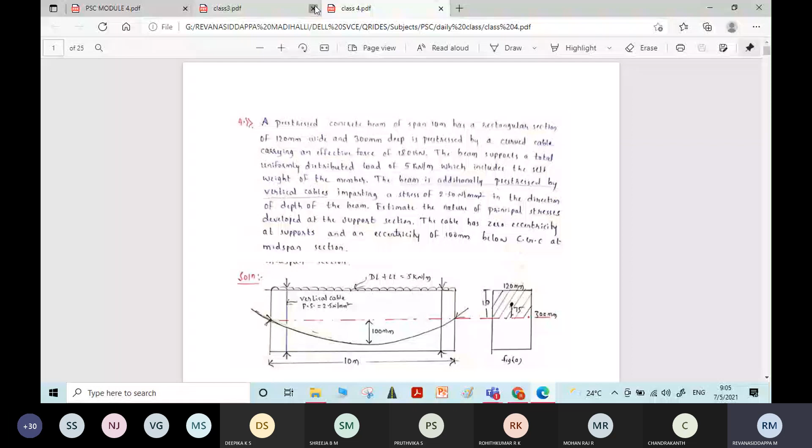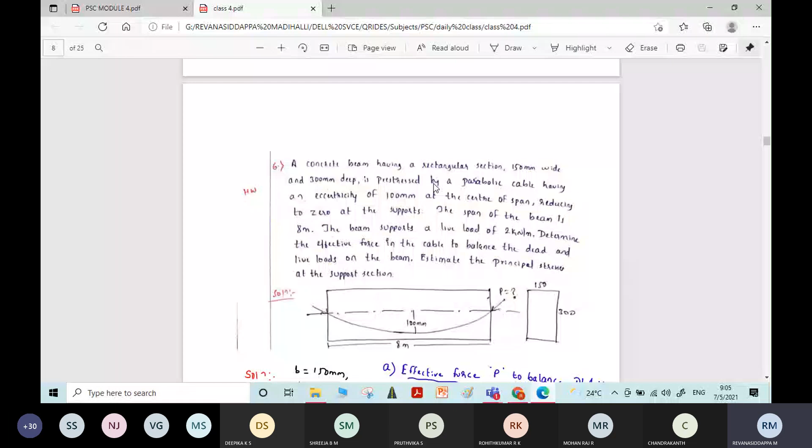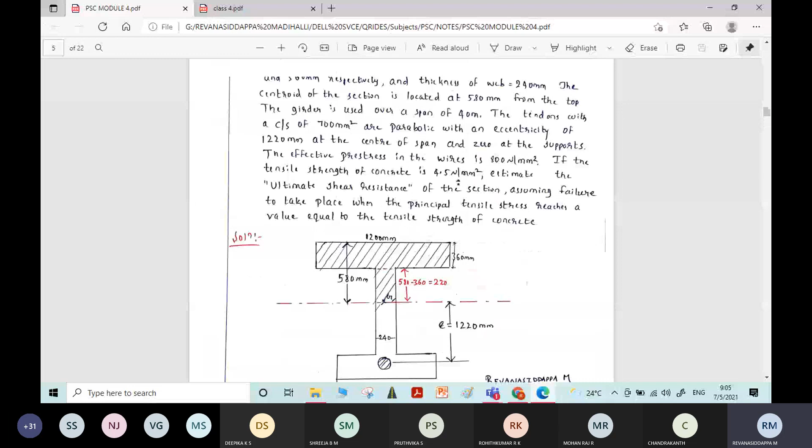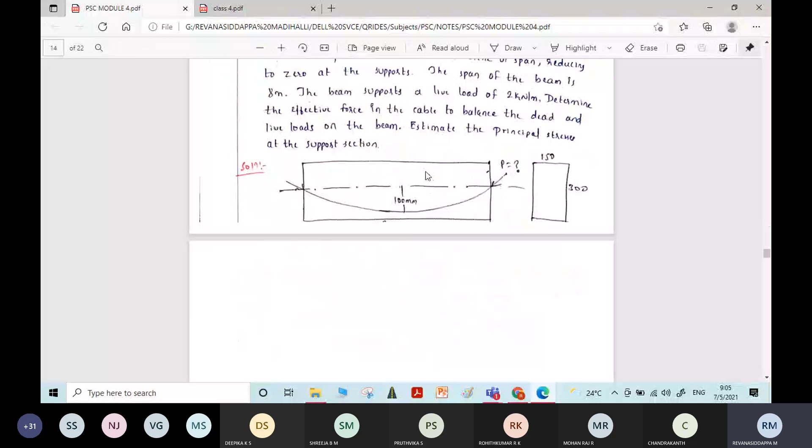We have solved up to problem number 6. Today we'll start with problem number 7. So all of you please note down problem number 7. Take 2 minutes time.

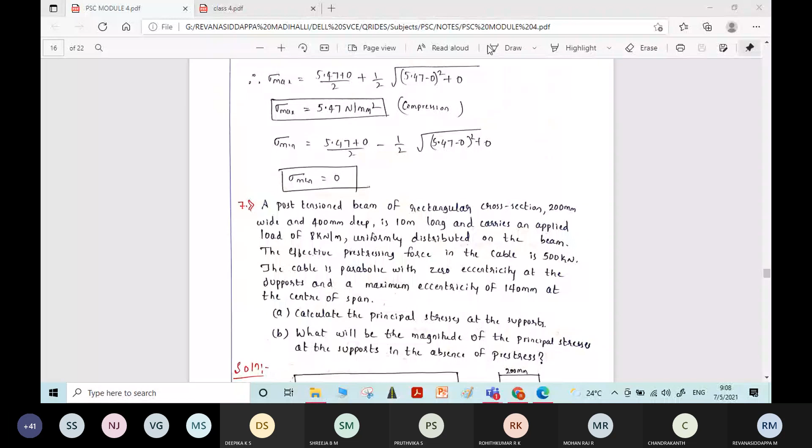Write the diagram as well. Over, students? Written or still writing? Writing, sir. Okay, I think you all have written. Shall we proceed? Yes, sir.

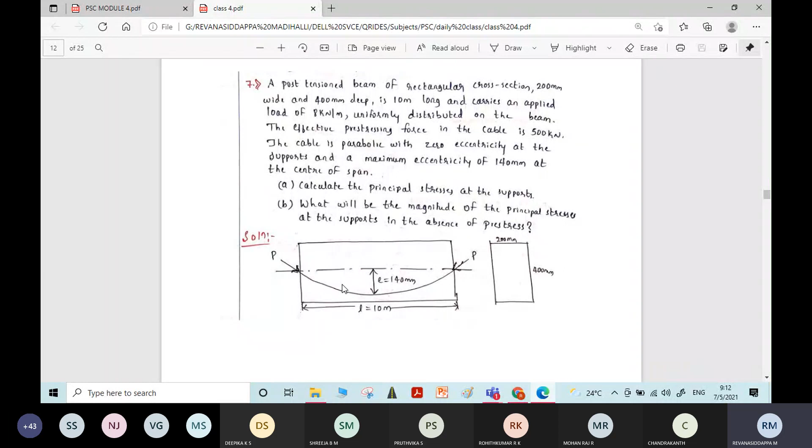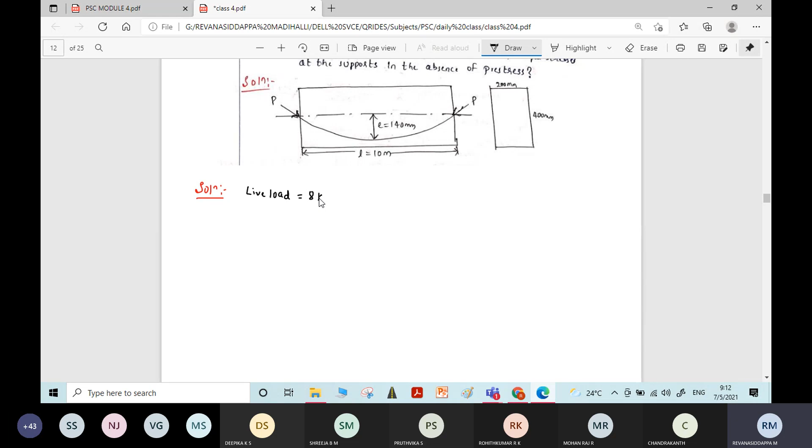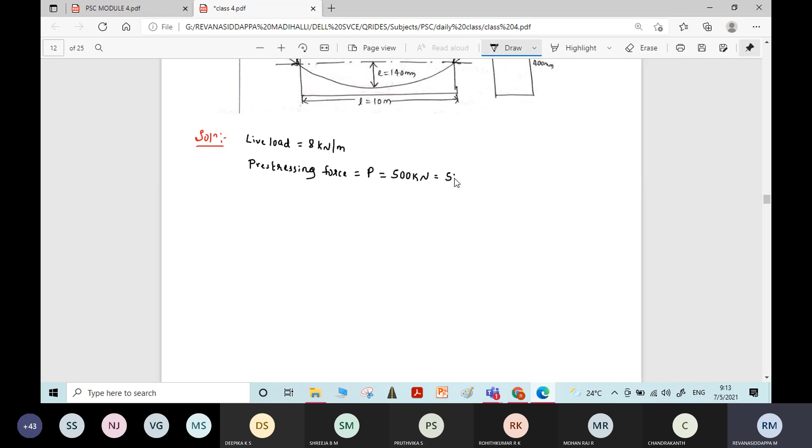Live load is given as 8 kilonewton per meter. Then effective pre-stressing force P is given as 500 kilonewton. P is equal to 500 kilonewton, that is 500 Newton times 10 power 3. Okay, then what else is given? Eccentricity and all given, that is written in the figure only.

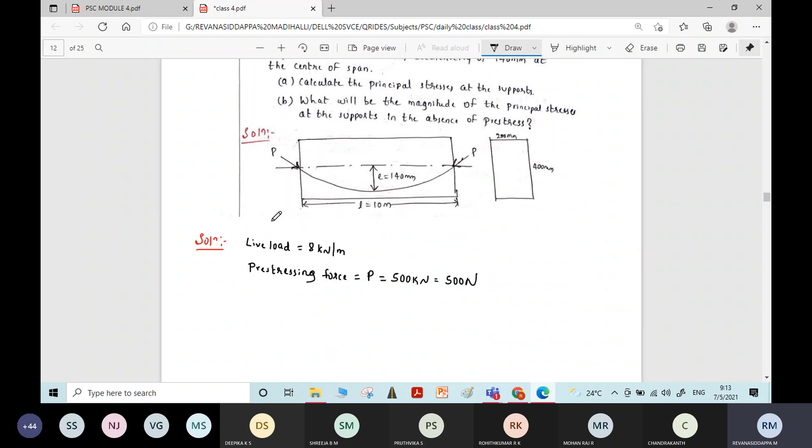Okay, now we will go with the first question to calculate principal stresses at the supports. First one: principal stresses at the support.

Okay, we have the formula, right? That formula you write it, and whatever the required parameters to be determined, that you find and substitute, you will get the answer. So we know the formula for finding the principal stresses, that is sigma max or sigma minimum is equal to fx plus fy divided by 2, plus or minus half of root of fx minus fy whole square plus 4 tau v square.

Okay, you find one by one. First you find fx, horizontal pre-stress. Fx is equal to P by A. Area of cross section we can find it, A is equal to b into d.

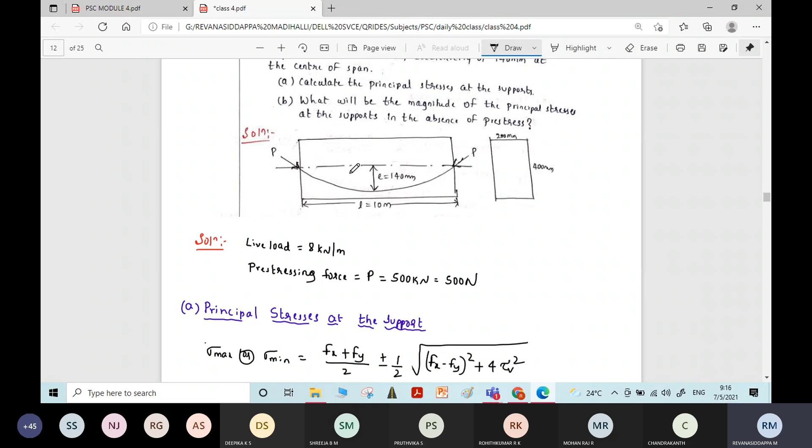Then what else is required? Fy is required, a vertical pre-stress, and there is no vertical tendons given in the beam. Therefore, Fy will be 0. Fy, vertical stresses, equal to 0.

Then Fx is over, Fy is over. What else is required? We need a shear stress tau v, right? To find tau v, we have the formula. Tau v is equal to Vu into Ay bar divided by I into B.

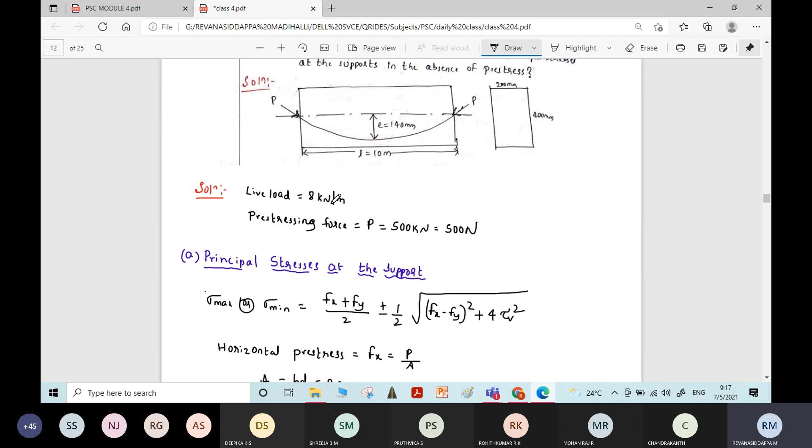Now we need shear force which is acting at the support, and in the problem the live load is given. Self weight of the beam should also be considered, right? First you find the self weight or dead load of the beam. Live load is given. The dead load plus live load will give the total load, and using that total load we will find the shear force at the support.

Okay, therefore the dead load of the beam is given by: dead load of beam is equal to, the cross sectional area is 0.2 into 0.4, that is 200 mm by 400 mm. 0.2 into 0.4 into density 24. So what is the dead load? 1.92 kilonewton per meter.

Then live load on the beam is given. Live load on beam is equal to 8 kilonewton per meter. Therefore, the total load is equal to 1.92 plus 8, that is 9.92 kilonewton per meter.

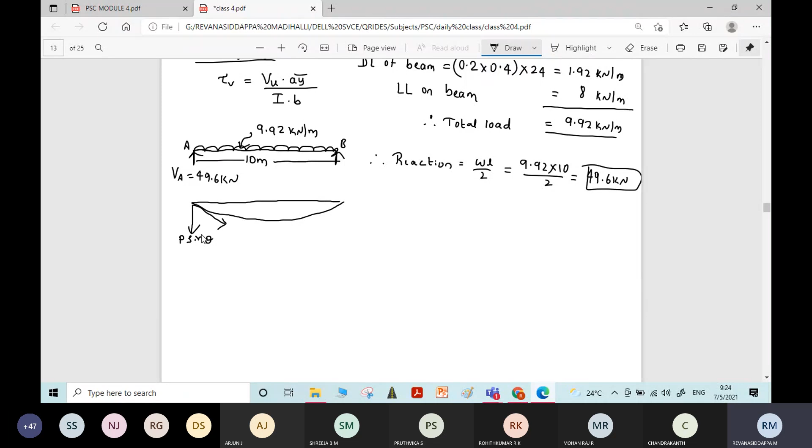It's a parabolic cable. So vertical component of the pre-stressing force is P sin theta. Therefore, total reaction at the support is VA minus P sin theta. Total shear force acting at the support is the difference of the reaction at the support and the vertical component of the pre-stressing force. So it is VA minus P sin theta. For parabolic cable, we know the formula for sin theta.

For parabolic cable, the sin theta value is, what is the formula? 4E by L, correct? 4 into eccentricity at the mid span is 140 mm, into 140, divided by 10 meters the span, that is 10,000. So by this you will get sin theta value as 0.056.

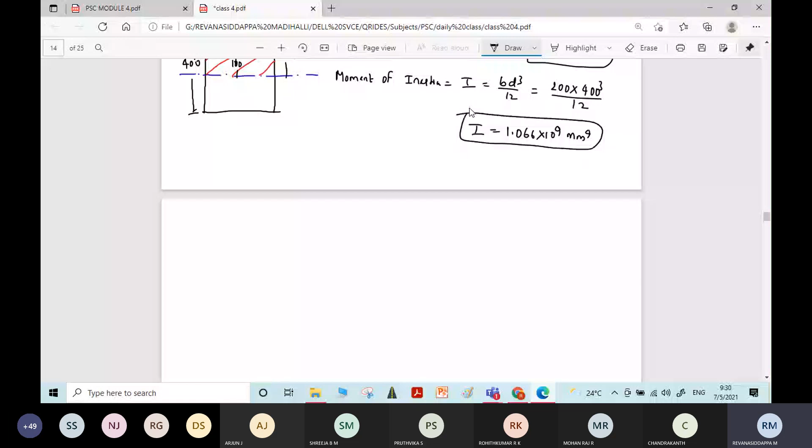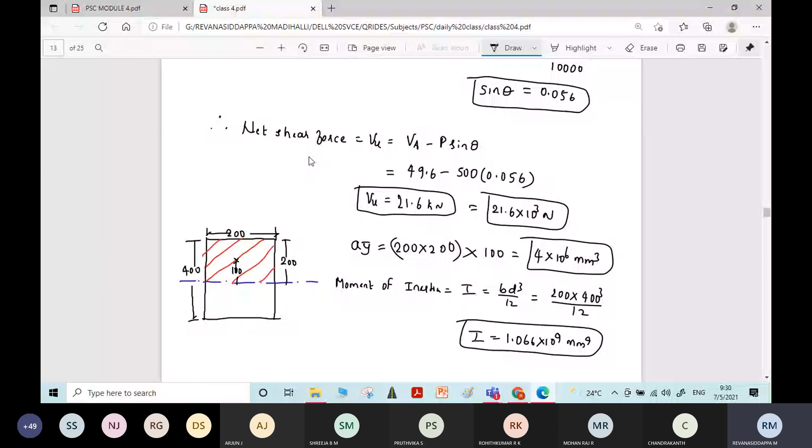Width of the beam, now you can calculate total shear stress. Therefore, tau v is equal to Vu into AY bar divided by IB. Vu is 21.6 into 10 power 3 Newton, into AY bar value is 4 into 10 power 6, divided by I, which is 1.066 into 10 power 9, into width of the beam which is 200. Therefore the shear stress is equal to how much? 0.405 Newton per mm square.

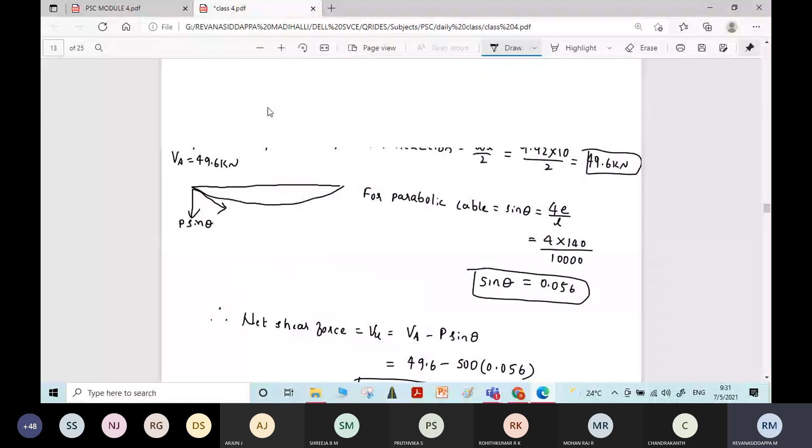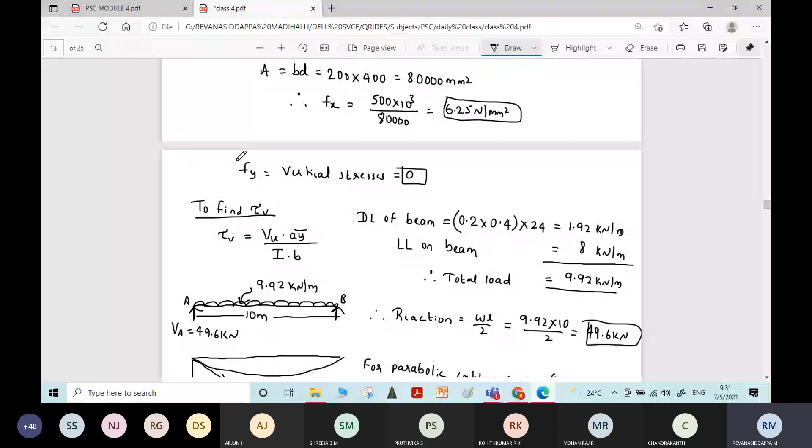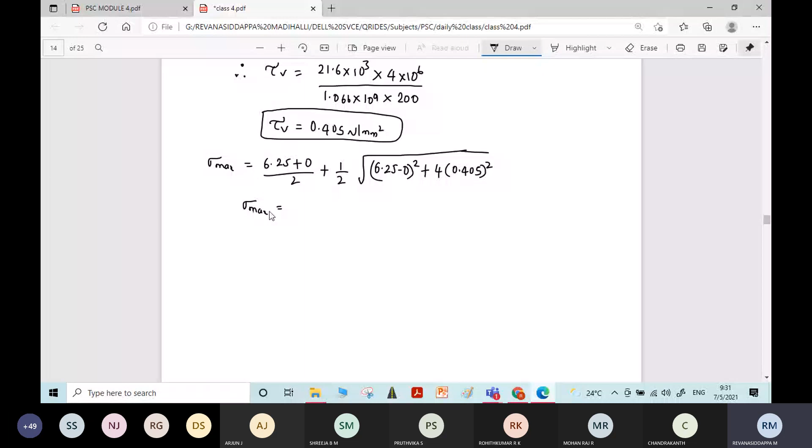Now you can find principal stresses, sigma max or sigma minimum. Every parameter is known, now just substitute and get the answers. First find sigma max. Sigma max is equal to fx plus fy divided by 2. Fx value is 6.25, Fy is 0. Therefore it is 6.25 plus 0 whole divided by 2, plus half of root of fx minus fy, that is 6.25 minus 0 whole square, plus 4 tau v square into 0.405 whole square. How much? 6.27, yes, 6.27 Newton per mm square. You are getting the positive answer, which is nothing but the compressive stress.

Compressive stress. Then find sigma minimum, which is equal to 6.25 plus 0 whole divided by 2, minus half of root of 6.25 minus 0 whole square plus 4 into 0.405 whole square. Tell me the answer. Minus 0.026 Newton per mm square, which is tension.

To this, the first problem or the first question is over. Now we'll move on to the next question. Just look into the next question. What will be the magnitude of the principal stresses at the supports in the absence of pre-stress?

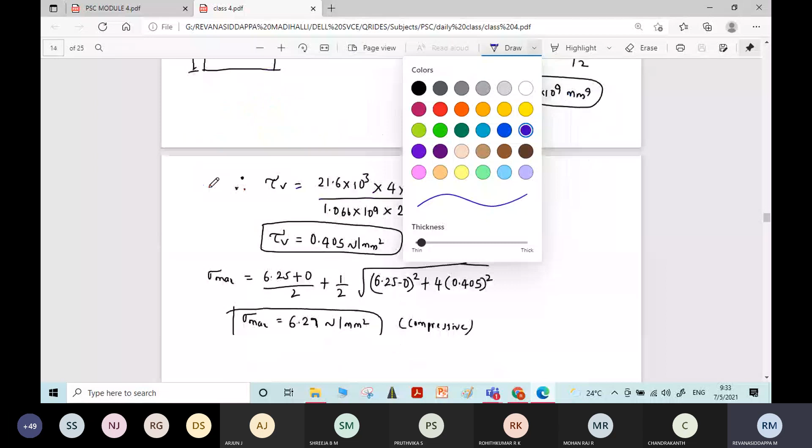Here pre-stressing force P equal to 0 in second case. Case B, principal stresses, problem number B, principal stresses in the absence of pre-stress, that is P equal to 0.

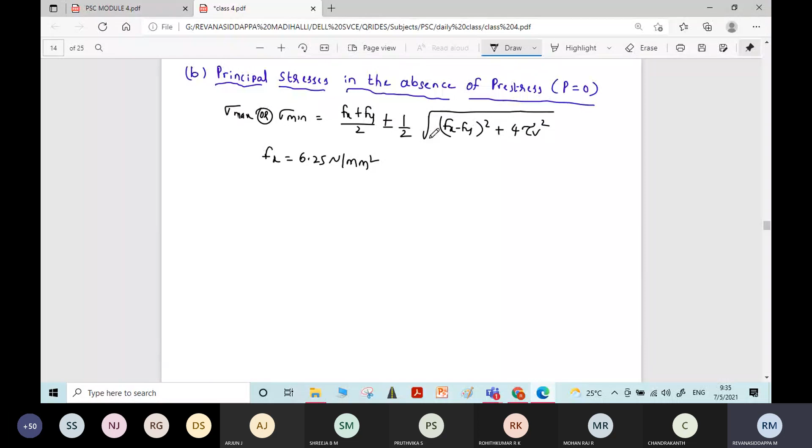Use the same formula. We know that sigma max or sigma minimum is equal to fx plus fy divided by 2, plus or minus half of root of fx minus fy whole square plus 4 tau v square. Fx is 6.25 Newton per mm square, that we have earlier determined already. Here pre-stressing force P equal to 0, that is why it becomes 0. Fx equal to P by A. Here pre-stressing force is equal to 0, therefore Fx becomes 0. Fy is already 0.

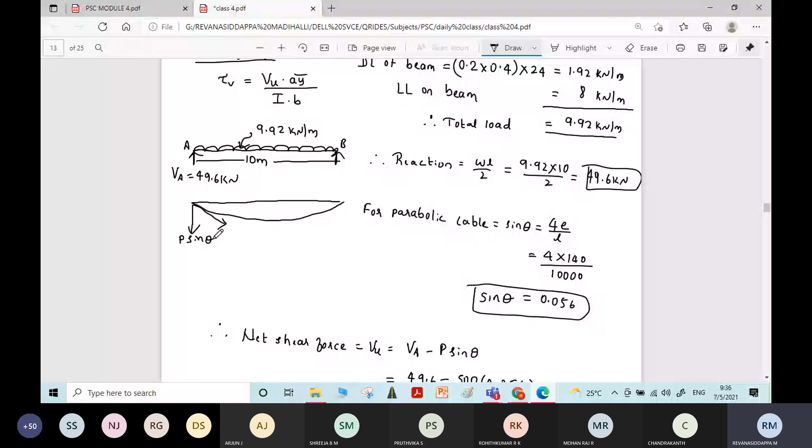And tau v, shear stress, again you write the formula and perform the calculation. Tau v shear stress is equal to Vu into Ay bar divided by Ib. We know the reaction at the support. Reaction at the support Va is equal to how much it was? 49.6 kilonewton. Now let us write the diagram once again. 49.6 kilonewton. Then we need P sin theta value. P sin theta value will be equal to 0 because pre-stressing force P equal to 0.

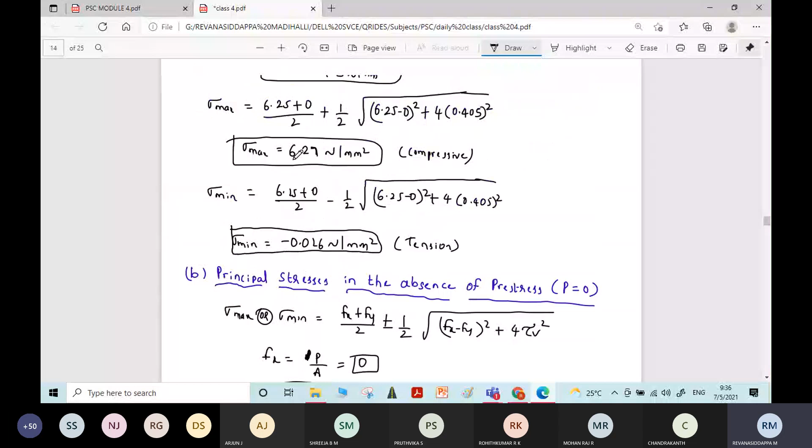Therefore, what is the net shear force which acts at the support section? Therefore, the net shear force is equal to Vu is equal to Va minus P sin theta. Therefore, Vu is equal to Va which is 49.6 minus 0, equal to 49.6 kilonewton. So as there is no pre-stressing force, whatever the reaction at the support is, that is only the shear force which is acting at the support section, 49.6 kilonewton only. Now you find tau v.

Tau v is equal to Vu, 49.6 into 10 power 3 Newton, into Ay bar. Earlier we have already calculated it, how much? 4 into 10 power 6. Tau v is equal to Vu into Ay bar divided by Ib. Moment of inertia, how much it was? Moment of inertia is 1.066 into 10 power 9.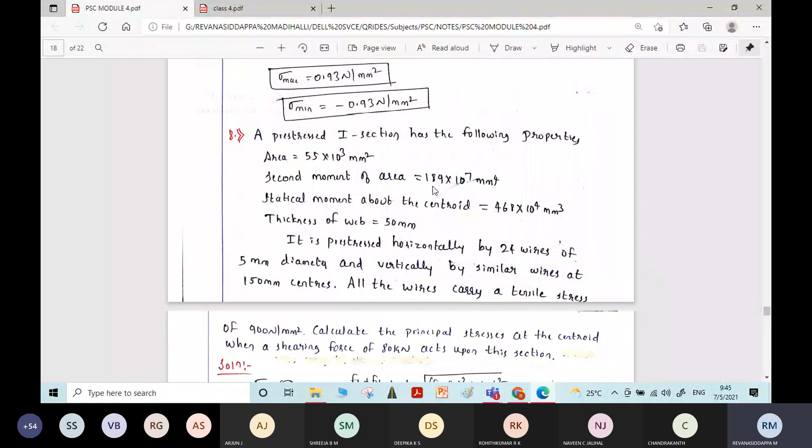Over, students. Yes, sir. Okay, all of you could just go through the problem.

A pre-stressed I section has the following properties. Area, total area of the I section is given, cross-sectional area. Second moment of area is given. Then second moment of area is what? What is the meaning of second moment of area? It is nothing but moment of inertia. Okay, moment of inertia. Then static moment about the centroid is given.

Static moment about the centroid means what? Static moment about the centroid, it is AY bar. Okay, static, you are taking moment of area about the centroid. That is why it is called static moment about the centroid. Therefore, it is called AY bar only.

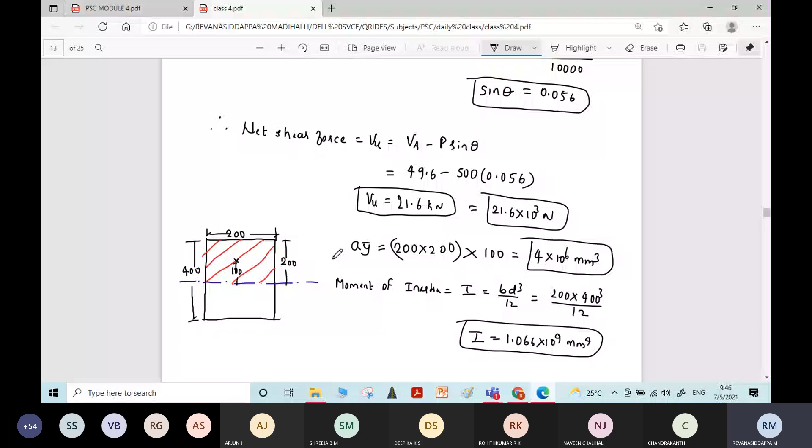Okay, AY bar only, don't get confused. AY bar is given. Thickness of web is given. And it is said that it is pre-stressed horizontally by 24 wires of 5 mm diameter and vertically by similar wires at 150 mm centers. Here pre-stressing is given in both horizontal and vertical direction. In the horizontal direction there are 24 number of wires of 5 mm diameter, and in the vertical direction the same diameter bars are spaced all along the length of the beam at 150 mm center to center.

You go through the next point. All the wires carry a tensile stress of 900 Newton per mm square. It may be a horizontal wire or vertical wire. All the wires are carrying a tensile stress of 900 Newton per mm square, that is, pre-stress in the wires is given. Pre-stress in the horizontal wires and vertical wires is given as 900 Newton per mm square.

It is asked to calculate the principal stresses at the centroid when the shearing force of 80 kilonewton acts on this section. Even the shear force is given. So using all this data, we need to find the principal stresses. Okay, solution.

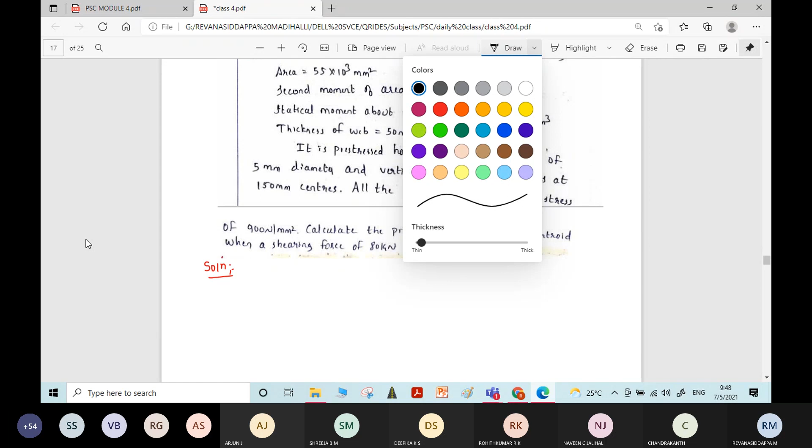First you write all the given data, whatever it is given in the problem. Area of cross section is given, A. Area of cross section A equal to 55 into 10 power 3 mm square.

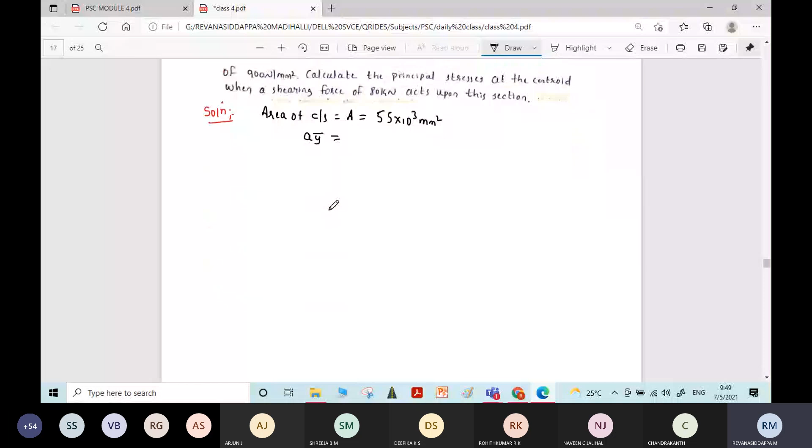Then second moment of area, which is nothing but AY bar, is equal to 189 into 10 power 7 mm. Sorry, second moment of area, moment of inertia, right? Moment of inertia. Better I'll write one more step here.

Second moment of area is equal to, it's nothing but moment of inertia. I is equal to 189 into 10 power 7 mm4.

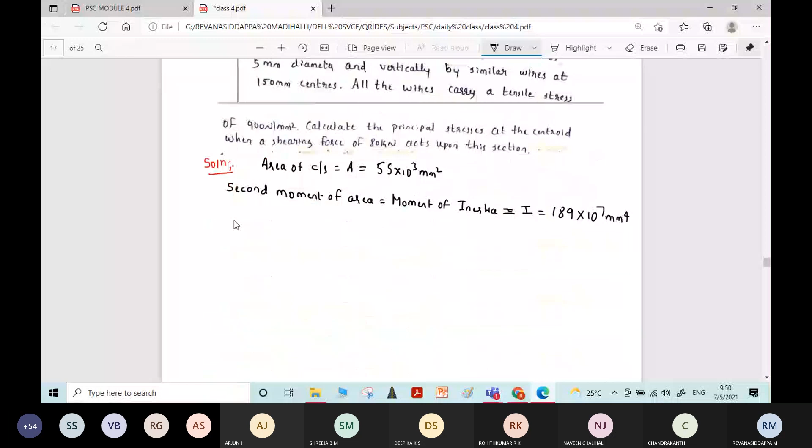Static moment about centroid, which is nothing but AY bar, is equal to 468 into 10 power 4 mm cube.

The thickness of web is given. Thickness of web, BW, is given as 50 mm.

What else is given? It is pre-stressed horizontally by 24 wires of 5 mm diameter. Calculate the total area of pre-stressing steel. There are 24 wires having 5 mm diameter. Area of cables is equal to area of one bar, pi d square by 4, that is 5 square by 4, into 24 numbers. The answer is 471.23 mm square.

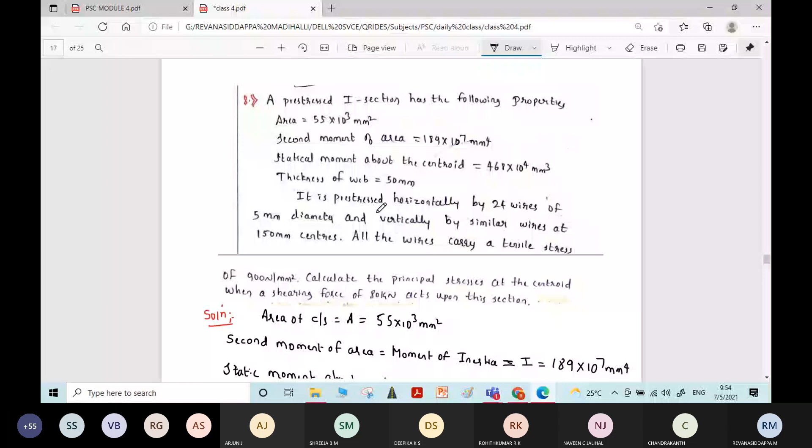Then what else is given? Shear force is given. Shear force Vu is equal to 80 kilonewton. Okay, this is all the given data. Now the question is to find principal stresses. Calculate the principal stresses at the centroid when a shearing force of 80 kN acts on the section.

We need to find principal stresses. We know the formula to find the principal stresses. Sigma max or sigma minimum is equal to fx plus fy whole divided by 2, plus or minus half of root of fx minus fy whole square plus 4 tau v square.

Now you find one by one. First fx, horizontal pre-stress. Fx is equal to, what is the formula? P by A. Here A is area of I section, area of cross section, not area of the cables. So to find pre-stressing force we used area of cables, but here to find horizontal pre-stress we need to use area of the section. Pre-stressing force we have already calculated, 424.1 into 10 power 3, divided by area.

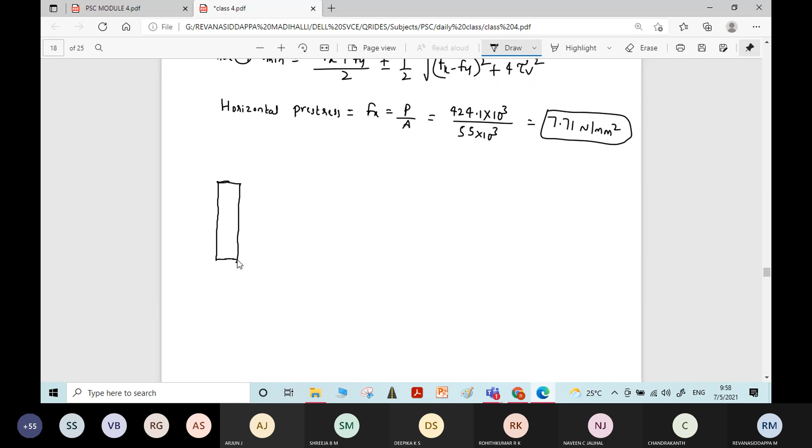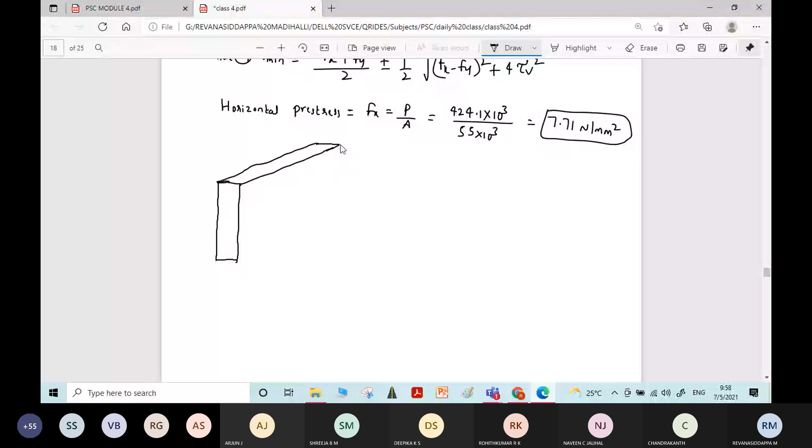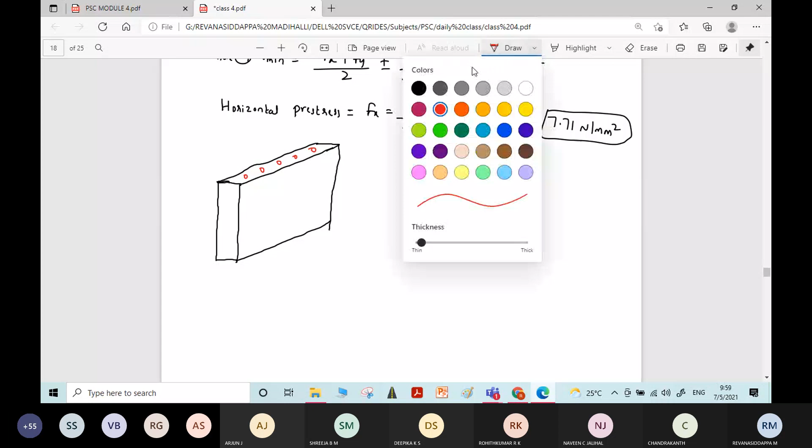Here I have written the web of the beam, just the web of the beam. Flanges are not written, whatever diagram I have written is the web of the beam. In the problem it is said that there are 5 mm diameter bars placed at 150 mm center to center all along the length of the beam, like this. So this spacing is 150 mm, and diameter of the bar is 5 mm.

So we need Fy. I'll write the plan of the diagram, the same diagram now. I'm writing the plan.

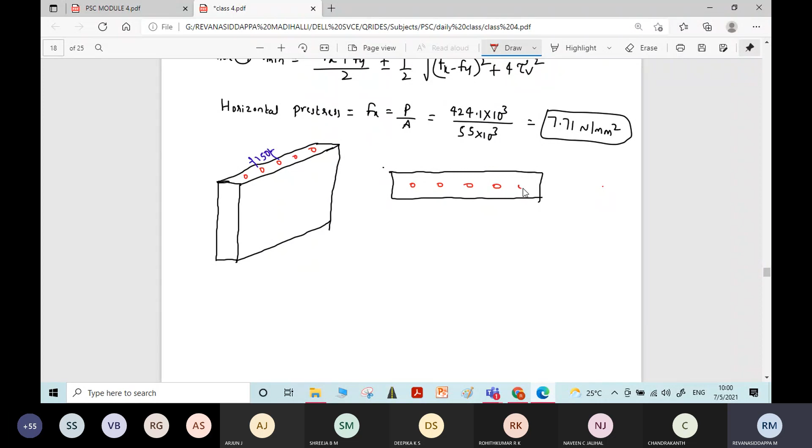It is 150 mm center to center.

Now we need to find Fy, vertical pre-stress. Vertical pre-stress is equal to Fy, which is stress equal to force by area, P by A. Now to calculate this vertical pre-stress, what we will do is consider one particular bar.

For one bar, the stress acting on the bar is given. What is the stress acting on the bar? It is tensile stress, 900 Newton per mm square.

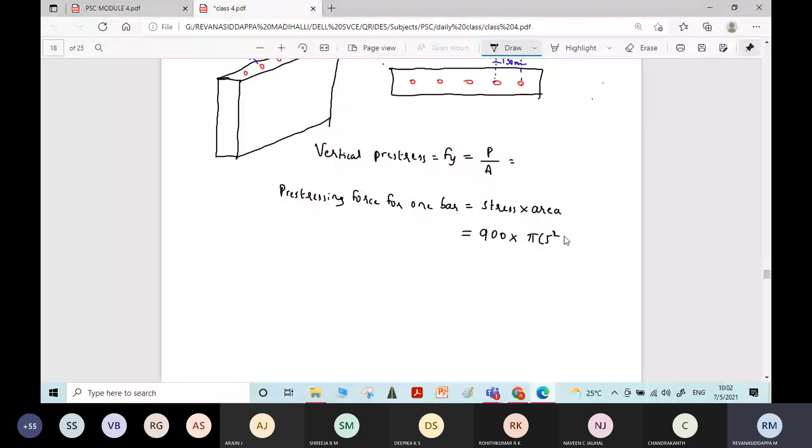So, pre-stressing force for one bar is equal to stress into area. Stress in the bar is given as 900 Newton per mm square, into area of one bar which is pi into 5 square divided by 4. Tell me the answer.

17,671.45 Newton. Okay, now we have calculated pre-stressing force P for one bar.

Now we will calculate area of cross section under one bar. A equal to, see, this is the plan which I have written. The area of cross section, the effective area of cross section for one particular bar will be...

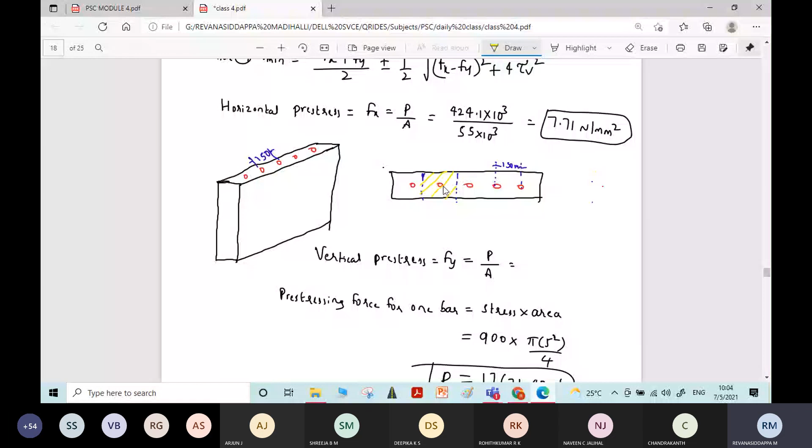The spacing of the bar is 150 mm center to center. If you are measuring stress for one bar by considering only that one bar, the area under that one bar will be half of the spacing on either side. Half of spacing on either side becomes 75 and 75, so total length will be 150 only.

And thickness of web is given in the problem. BW, how much is it given? BW is 50 mm, here we mention it. Thickness of the web is 50 mm.

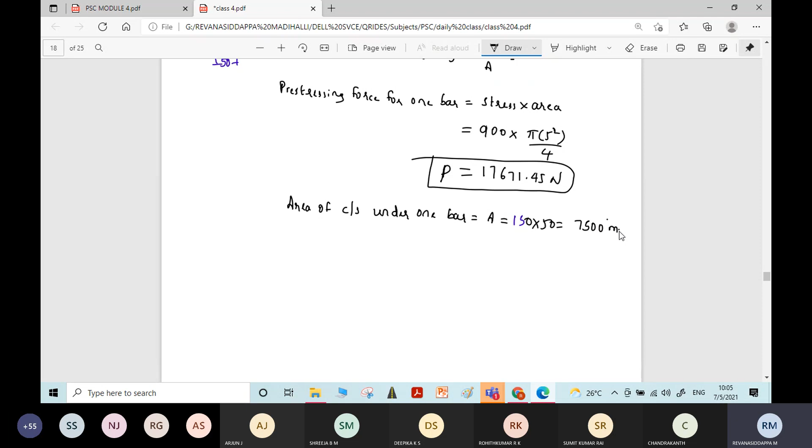Therefore, area under 1 bar is how much? Tell me, students. 7,500 mm square, sir. Yes, it is 150 into 50 is area under 1 bar. So 7,500 mm square. Understood, students? Any doubts here? Understood? Yes, sir.

Okay, this is very simple. What I have done is to calculate the vertical pre-stress, I considered only 1 bar, area of 1 bar I considered. For pre-stressing force in 1 bar I have calculated, and area under 1 bar we have calculated, and pre-stressing force for 1 bar divided by area of cross section under 1 bar will give stress.

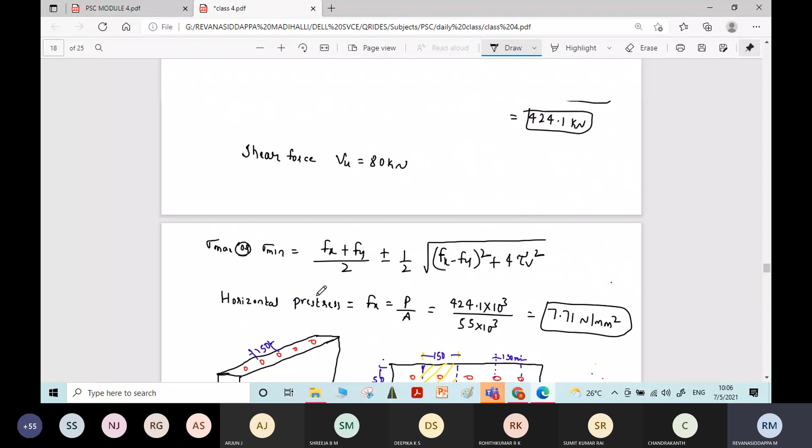While calculating Fx we considered all the bars, pre-stressing force in all the bars divided by area of all the bars. Sorry, here it is total pre-stressing force divided by full area of cross section, because this pre-stressing force is calculated based on the total area of bars. But that is the difference. Here, what we do is pre-stressing force is calculated by considering all the bars all over the cross section, therefore it is pre-stressing force divided by total cross sectional area.

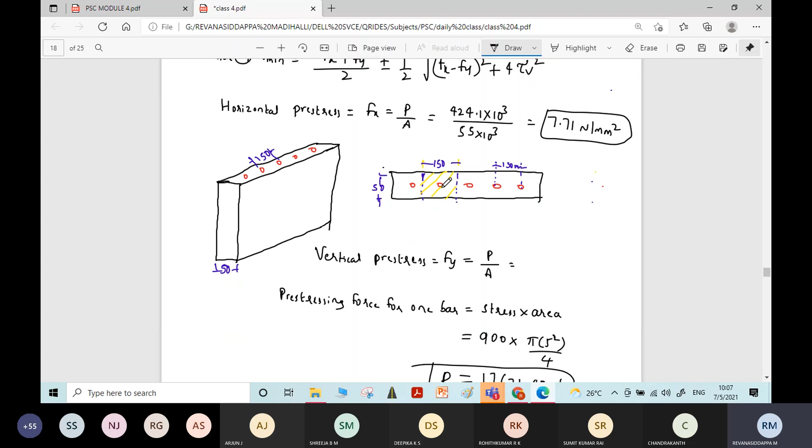Here, as you are considering only 1 bar, you need to consider area under 1 bar only. I hope you all understood this. If you have any doubts, you can ask.

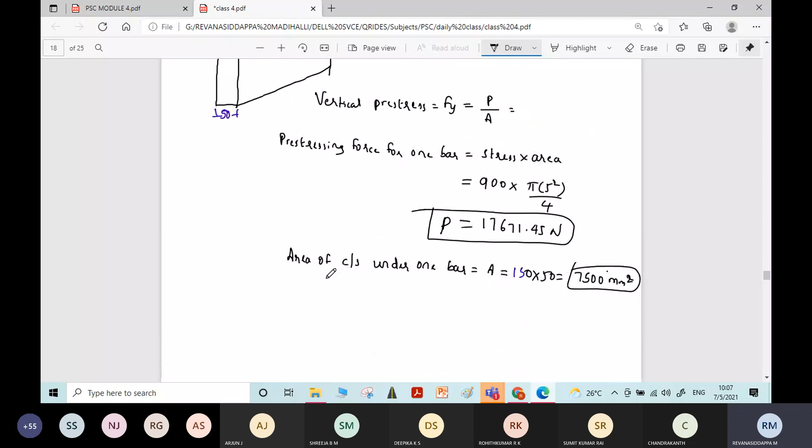Now you can find Fy. This is the only important step here. Fy is equal to P by A, 17,671.45 divided by 7,500. 2.35.

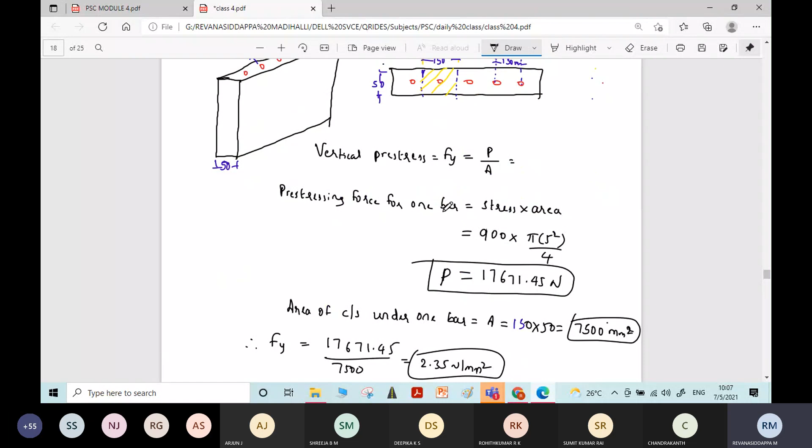So while measuring Fx, we considered all the bars and full cross sectional area. While measuring Fy, we considered only 1 bar and area under only that 1 bar. That is the difference.

So if you know the total number of bars along the length of the beam, you can calculate it like Fx. Here, total number of bars is not given in the problem, he has just given the spacing and diameter of the bar. So if only spacing and diameter is mentioned, this is how we calculate the vertical pre-stress.

If total number of bars is given, total number of bars multiplied by stress will give total force, and total force divided by total area of web in the plan will give Fy. So as only spacing is given, we need to follow this method, considering only 1 bar to find the stress.

Now Fx is known, Fy is known. Next we have to calculate tau v, shear stress. Tau v is equal to Vu into Ay bar divided by Ib.

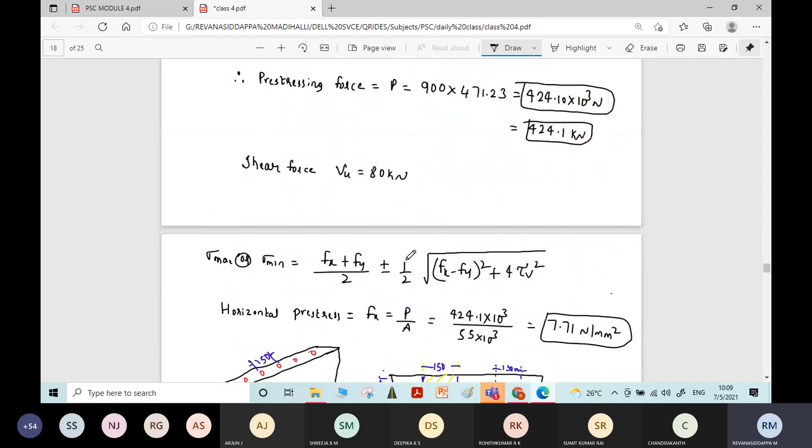Vu into Ay bar divided by Ib, where V is the shear force. Shear force is directly given in the problem itself, 80 kilonewton. V is equal to the shear force, which is 80 kilonewton, that is 80 into 10 power 3 Newton.

Even Ay bar is also given, right? No need to calculate it. Ay bar is equal to 468 into 10 power 4 mm cube.

Then moment of inertia is also given. That is second moment of area. How much is it? 189 into 10 power 7 mm4.

Then what else? B. What is B? B means how much here? Tell me, how much we have to take? Width of web, okay, BW. How much is it? 50 mm.

Nothing but BW only. See, because the pre-stressing steel is given in the web portion only, even the horizontal pre-stressing steel will be given in the web portion only. That is why we need to consider width of web, not the width of flange. Here width of flange is not given only, but even if it is given, don't get confused. You take width of web only.

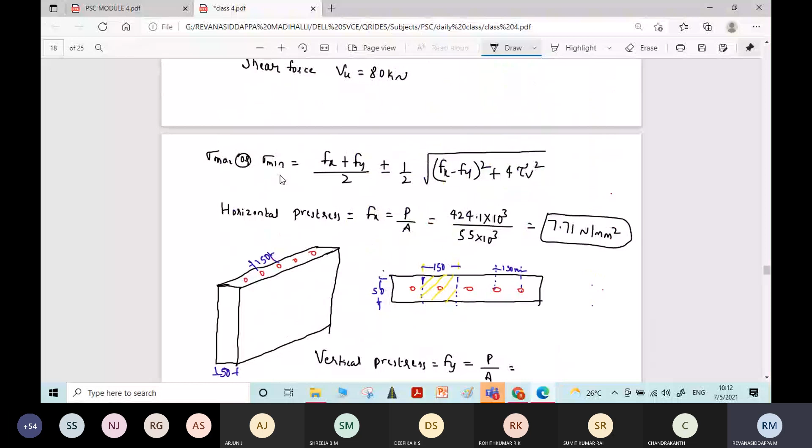Fx is 7.71, Fy is 2.35. So it's 7.71 plus 2.35 divided by 2, plus half of root of Fx minus Fy whole square, that is 7.71 minus 2.35 whole square, plus 4 tau V square, 3.96 square.

9.81, how much? 9.81, 9.8, yes. Plus sign, which is nothing but compression.

And sigma minimum is equal to 7.71 plus 2.35 whole divided by 2, minus half of root of 7.71 minus 2.35 whole square plus 4 into 3.96 square. Tell me the answer.

How much? 0.6, yes, 0.25 Newton per mm square. So this is also getting plus sign, therefore compression. Nature of stress is compression.

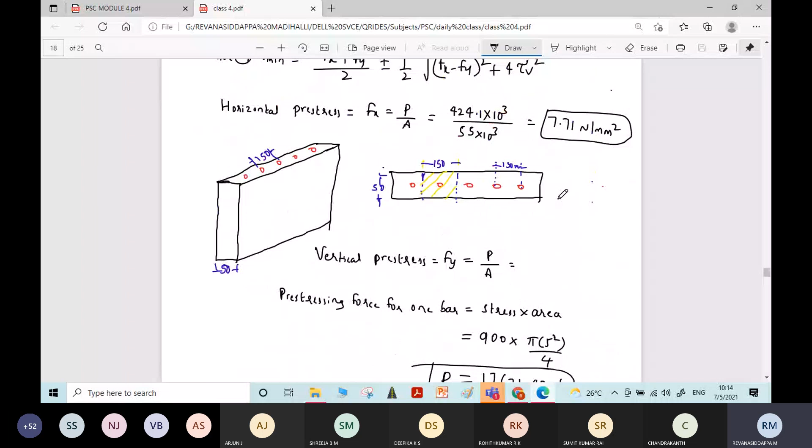Shall we move on to the next one? Yes, sir. Okay.

Problem number 9. Write it first, take 2 minutes time.

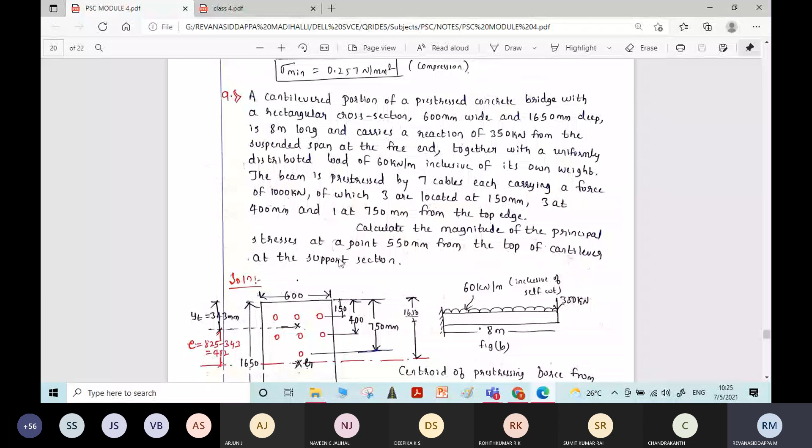The beam is pre-stressed by 7 cables, each carrying a force of 1000 kilonewton. Okay, there are 7 cables provided in the beam, and each cable is carrying a force of 1000 kilonewton, of which 3 are located at 150 mm, 3 at 400 mm, and 1 at 750 mm from the top edge. Okay, the same thing I have written here: 3 bars at 150 mm, 3 bars at 400 mm, and 1 bar at 750 mm from the top edge, not the bottom edge.

Okay, why from the top edge? Why from the top edge? What may be the reason? Here bars are provided from the top edge instead of providing from the bottom edge. What is the reason?

Cantilever beam it is. Have you designed the cantilever beam? For cantilever beam, the tensile stresses are developed at the top fiber and the compressive stresses are developed at the bottom fiber. That is why for cantilever beams we will provide the bars at the top only.

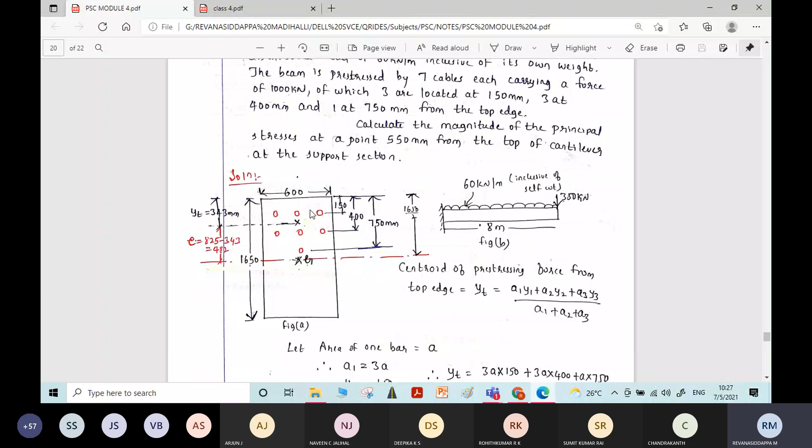Let us see the question. Calculate the magnitude of the principal stresses at a point 550 mm from the top of the cantilever at the support section. That is the question.

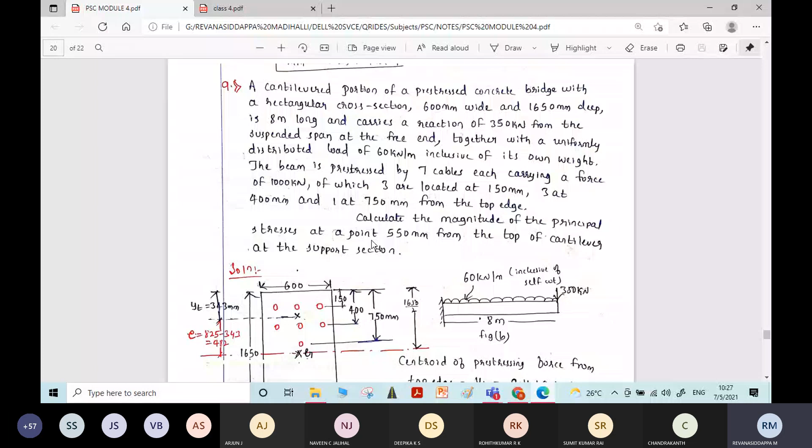Now, if you look into the previous problems, there were some parabolic bars which were having some eccentricity at the center of the span and 0 eccentricity at the support. Their eccentricity was directly known. But here there are 7 number of bars placed at different spacing from the top fiber: 3 bars are spaced at 150 mm from the top fiber, 3 bars are provided at 400 mm from the top, and 1 bar is provided at 750 mm from the top. So for this condition we need to find the eccentricity.

What is eccentricity? Eccentricity is the distance between centroid of the pre-stressing cables to that of centroid of the whole section. For that we need to first locate what is the centroid of pre-stressing force.

If there is a single set of cables provided in a single row, it was directly the distance from center of this one row of cables to that of centroidal axis, giving the eccentricity. But here the bars are provided at different locations. First we need to locate centroid of the pre-stressing force, after that you can find the eccentricity.

To find the centroid of pre-stressing force we have the formula. Write it: centroid of pre-stressing force from top edge, Yt, is equal to a1y1 plus, there are 3 number of bars, 3 sets of bars or 3 rows of bars provided - first row, second row and third row. So we will find a1, meaning area of 3 bars, and the respective y1 distance of the centroid of bars from the top fiber, and a2y2 and a3y3 we will find. First you write this formula.

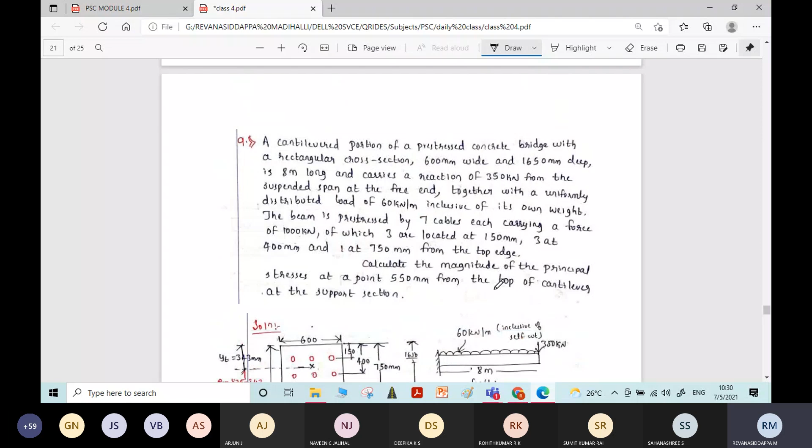Now first find A1. A1 is equal to area of first row of bars. Diameter of each bar - how much is given? Diameter... it is not given, right? Diameter is not given, just the number of bars are given.

Diameter is not given, but still we can find the location of the centroid, no problem, we will find it. What we'll do is we'll assume area of 1 bar be A. So there are 3 number of bars in the first row, therefore A1 becomes 3A. Am I right? All the bars are having the same diameter. If you assume area of 1 bar as A, area of first row of bars is 3A.

And what about Y1? See, we are finding centroid of pre-stressing force from the top edge. So here Y1 is the distance of centroid of the first row of cables from the top fiber. How much is it? It is directly known, 150 mm. Y1 is equal to 150 mm.

Are you understanding, students? Are you understanding? Please reply. Sir, repeat, sir. Okay, I'll repeat it, no problem.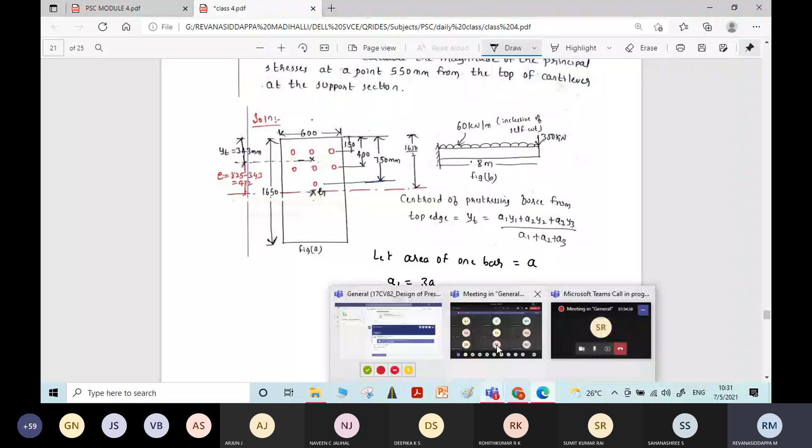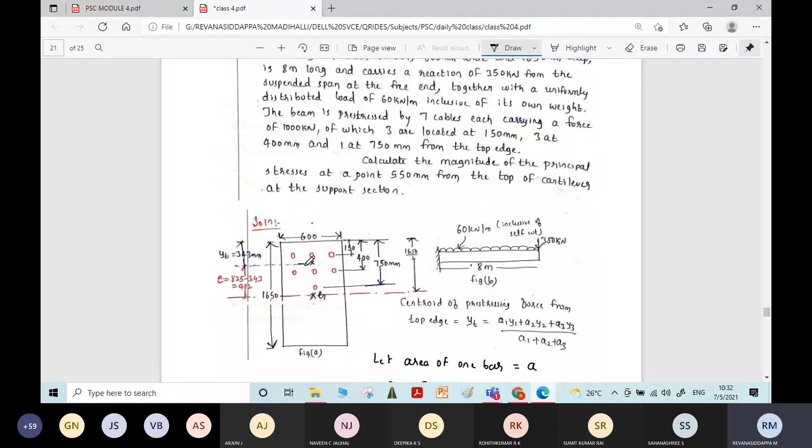See, students, in the previous problem we used to give directly the cable profile - the eccentricity at the support, the eccentricity at the midspan - used to be directly given. But here in this problem it is not given, we have to find it. Here the bars are located at different positions, so first what we have to do is find the centroid of the pre-stressing force. What is eccentricity actually?

If there is a pre-stressing bar, and this is the centroidal axis or the neutral axis of the section, the distance between centroid of the pre-stressing force and the neutral axis is nothing but eccentricity. Distance between centroid of pre-stressing force and the neutral axis or centroidal axis of the whole section is the eccentricity.

Here the bar is not positioned at a single location. Here 3 bars are located at 150 mm, 3 bars are located at 400 mm, and 1 bar is located at 750 mm. For that purpose, first we have to identify the centroid of all these bars. After knowing the centroid of all these bars, the distance between that centroid and the centroid of the whole section will give eccentricity. In this way we have to find the eccentricity here. You got the idea?

You understood? Yes, sir. Now to find the centroid of all the bars, we have the formula: Yt equals, with respect to top fiber, a1y1 plus a2y2 plus a3y3, divided by a1 plus a2 plus a3. There are three rows, the bars are provided in 3 rows. For each row I have considered area 1, area 2, and area 3.

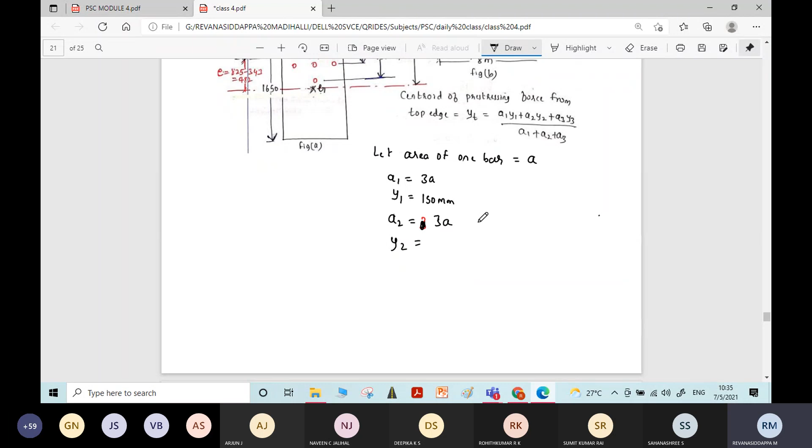a2 equals 3a. y2 how much? 400. Correct, 400 mm. And a3 is equal to, there is only one bar in the third row, so only a. a3 equals a, and y3 equals how much? Distance of the third row of bar from the top fiber is 750 mm.

750 mm. Therefore, yt is equal to... yt represents the distance of centroid of the bars from the top fiber. a1y1, that is 3a into 150, plus a2y2, 3a into 400, plus a3y3, a into 750, divided by a1 plus a2 plus a3, that is 3a plus 3a plus a. Take a common in both the numerator and denominator.

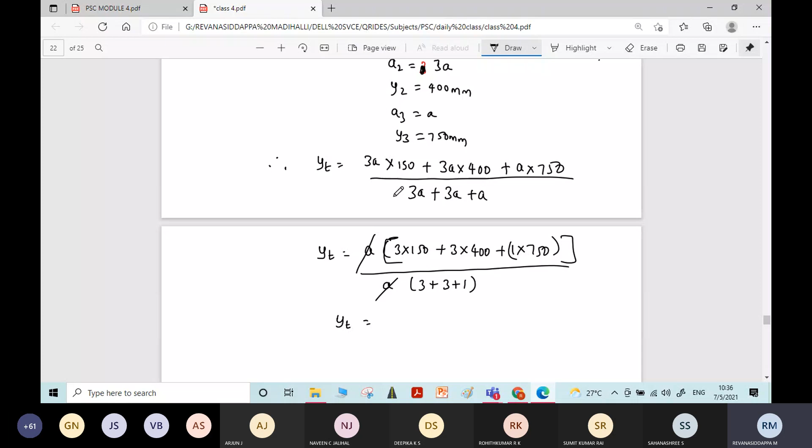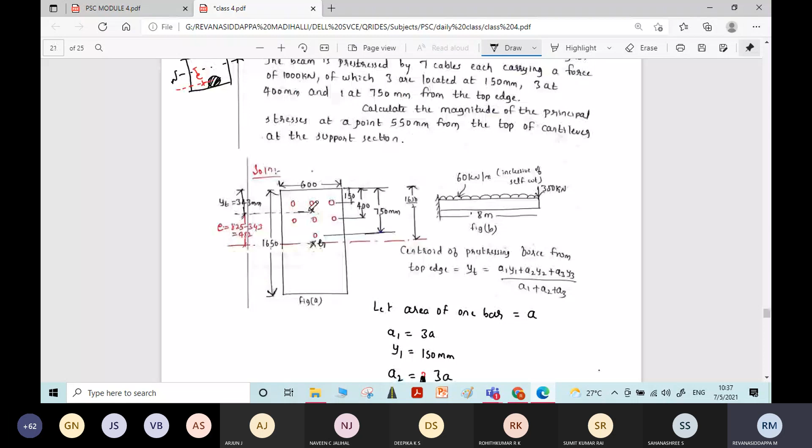Yt is equal to a into (3 into 150 plus 3 into 400 plus 1 into 750), all divided by a into (3 plus 3 plus 1). A gets cancelled, and you get the distance of the centroid of the cables. 342.8, round it off to 343 mm. Now you got the distance of the centroid of cables from the top fiber, that is 343 mm from the top fiber. You should have already mentioned that in the diagram.

Now you can find the eccentricity easily. Eccentricity is nothing but the distance between the centroid of the cable and the centroid of the whole section. So centroid of the whole section is total depth divided by 2. Total depth is 1650 divided by 2, which is around 825, minus 343. If you do that, you will get this eccentricity. Here I have done that calculation.

1650 divided by 2 minus 343, if you do, you will get the required eccentricity. Therefore, eccentricity E is equal to half of this depth, 1650 divided by 2, minus 343. If you do that, you will get the required eccentricity, which is 482 mm.

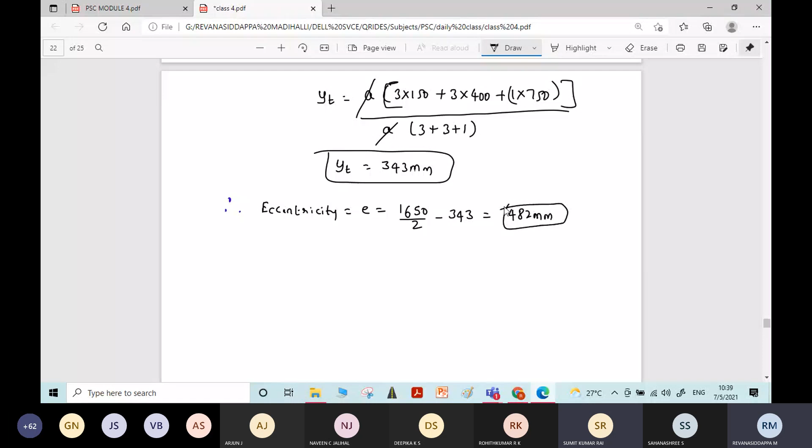Is there any doubts, students, in finding the eccentricity? No, sir.

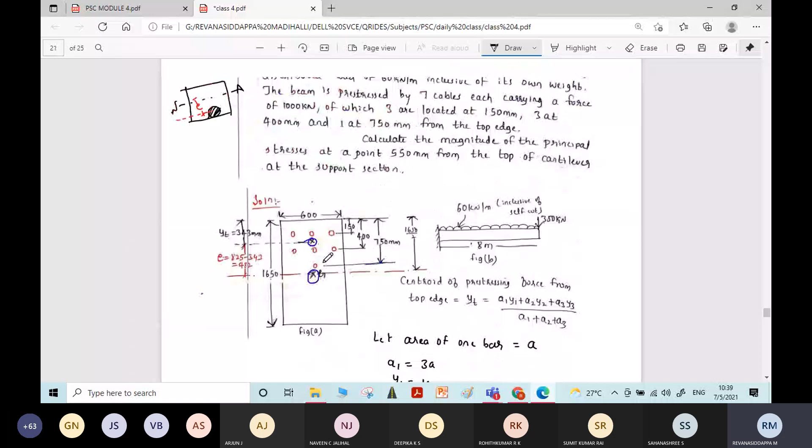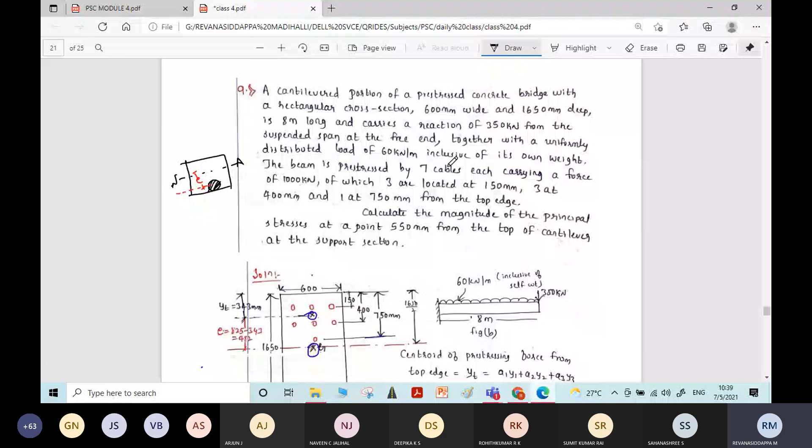Now it is said that there are 7 cables, each carrying a force of 1000 kilonewton. Therefore, the total pre-stressing force is equal to the number of cables times the force per cable, that is 7 cables each carrying 1000 kilonewton. So the total force you will get is 7000 kilonewton, or 7000 into 10 power 3 Newton. That is the P value.